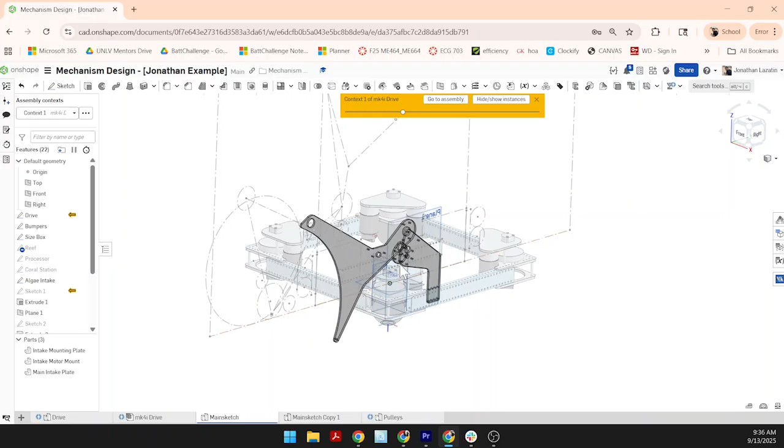Alright, so today we're going to go over a little bit of an intro to assemblies using the part studio that we created last time. This is the part for the 1 degree of freedom intake that we were talking about during class last week. I'm going to use those parts to show some ways to create an assembly here.

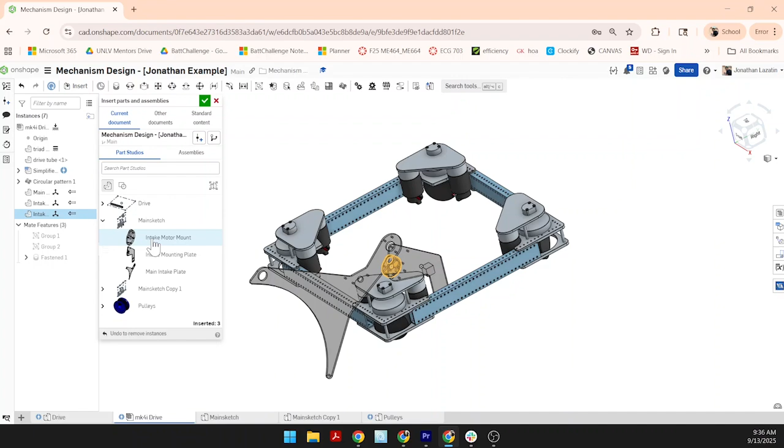The first thing I'm going to do is insert the parts from main sketch, which is where I design all the parts, so I can open that up. From here I see the 3 parts that I generated. I'll click those parts, without moving my mouse around to try to drop them in a specific location. I'm just going to click the parts and then press the green check mark.

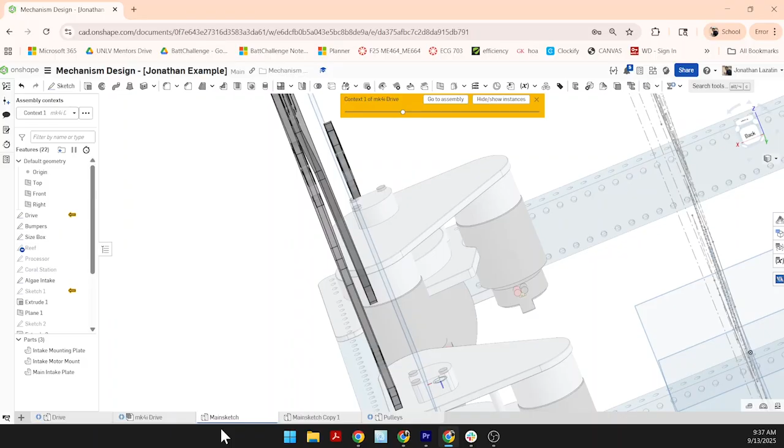That way it drops in the parts exactly where I designed them in the main sketch. Because I designed them in the places I want them to exist on the actual robot, this plate and this plate over here are exactly where I want them to be. So there's a couple of ways to get this to stay right here, like a cheater way to get your assembly going.

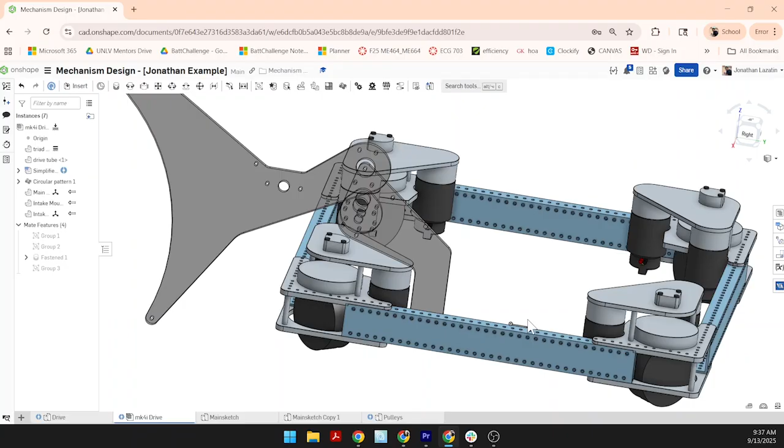If you know these parts are all, at least this mounting plate, where it's supposed to be, I can make a group and click the drivetrain and that side part. When it's in a group, they all stick together. Because the original mate was fixed and doesn't move, since this is grouped with it, it's also fixed and doesn't move without me having to create an actual mate to it. But we're not going to do that.

We're going to actually use mates today. Mates are different ways that you can constrain parts to other parts. They use what's called mate connectors to give you local coordinate systems and to match up in a way where it defines the specific degrees of freedom you want or don't want between 2 parts.

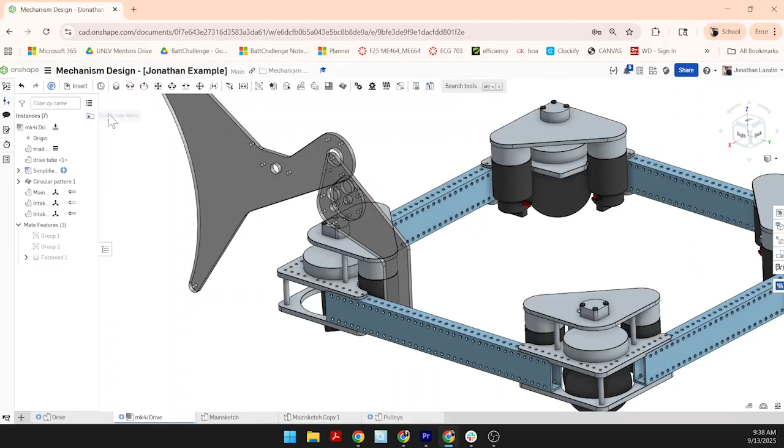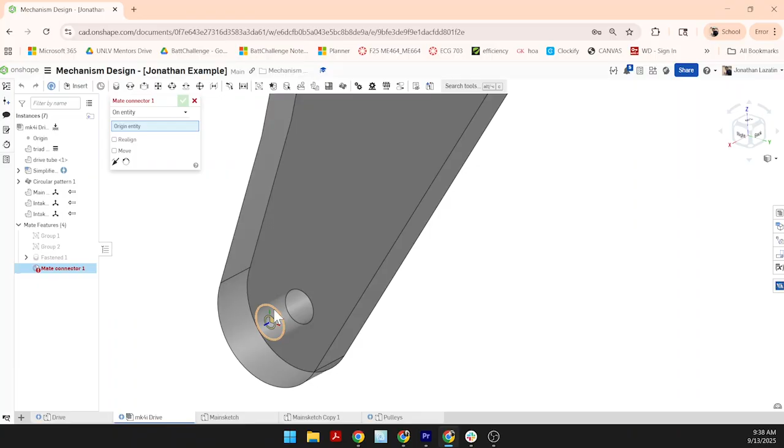For example, if I click this mate connector tool here and highlight a feature, it'll pop up with this orange disk, and you see this disk has a set of axes, blue, red, and green. In the convention of Onshape, blue is the z-axis, normal to the little disk that's getting populated inside that feature, and the red and green show you the directions of the local x and local y.

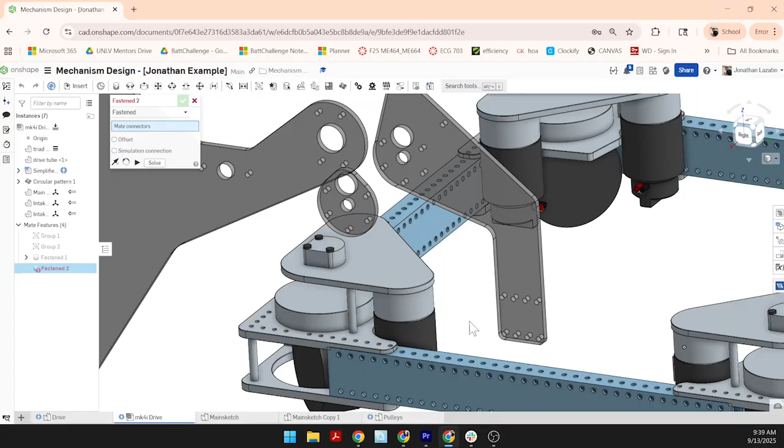So what I'm going to do here, in order to make this part stick to this part without it moving at all, so that's 0 degrees of freedom, I'm going to use a fasten mate. The hotkey is F. A fasten mate is a mate that makes 2 things attached to each other with no degrees of freedom allowed to move. I'm trying to see where that hole is. Okay, so these are the 2 holes I'm looking to mate. I'm going to press the fasten mate.

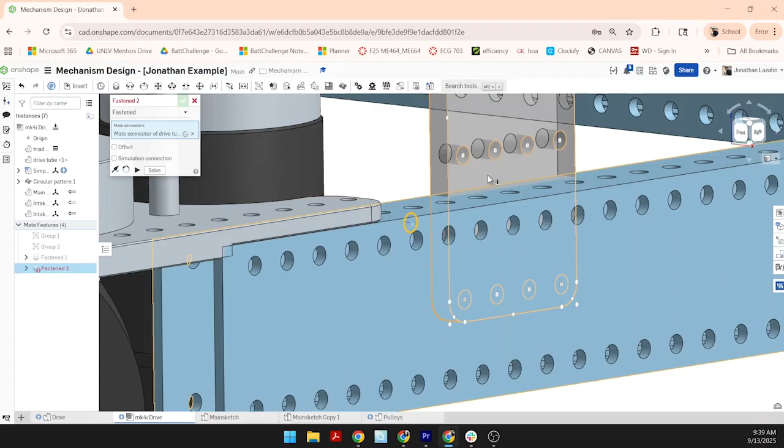I'm going to move this part off a little bit so I can see the hole better. I'm going to select here so that local axis pops up, that local coordinate system, and I want it to have the same origin as the local coordinate system at the surface of this plate. If I click here, you see the surface to surface touches, I solve it, it pops into the right spot, and I can press OK, good. So that's the actual axis I want it to be on.

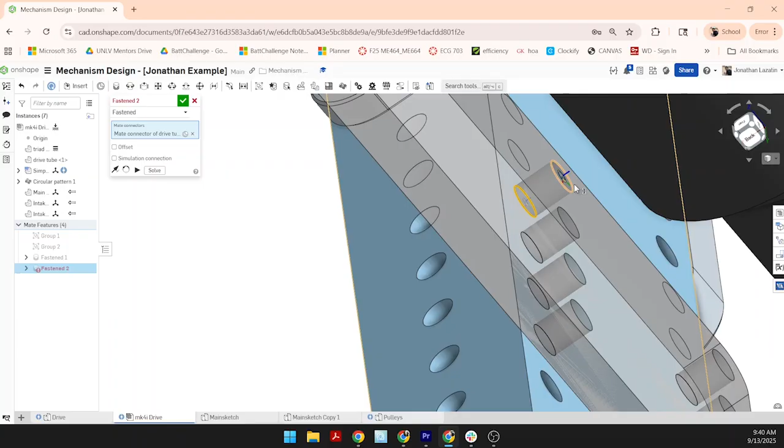Just to explain why that specific face of the intake - let's say I select this back face, it's the same z-axis. The z-axes are aligned with each other, but the x and y's are not. So if I click this one, it'll actually move the part. If I solve it, it'll move the part inside one of another, because the mate connector is trying to make these 2 coordinate systems, the origins, sit right on top of each other. So we don't want that in this case.

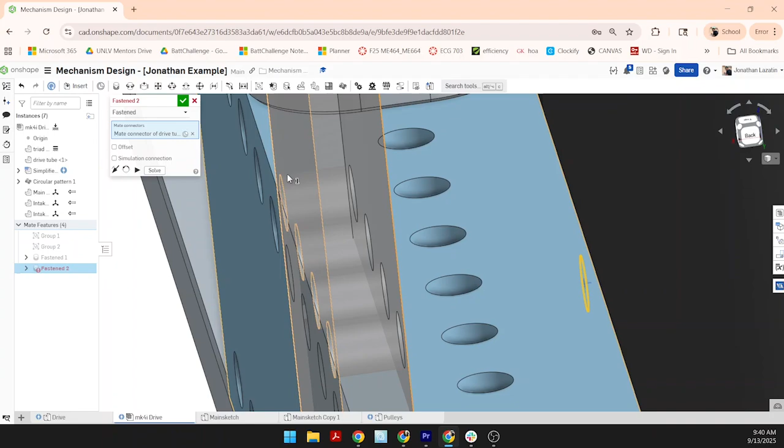We want the other face, because that is the face that we actually want to be touching the drivetrain. So that's fasten mate, 0 degrees of freedom, fully constrained.

I could also use fasten mate with an offset in order to get a specific distance. This plate and this plate are designed to be 1 inch apart, so I'll use the fasten mate hotkey F. I want that circle to touch that circle, but I want it to be 1 inch away. Usually to create separation like this, you go negative.

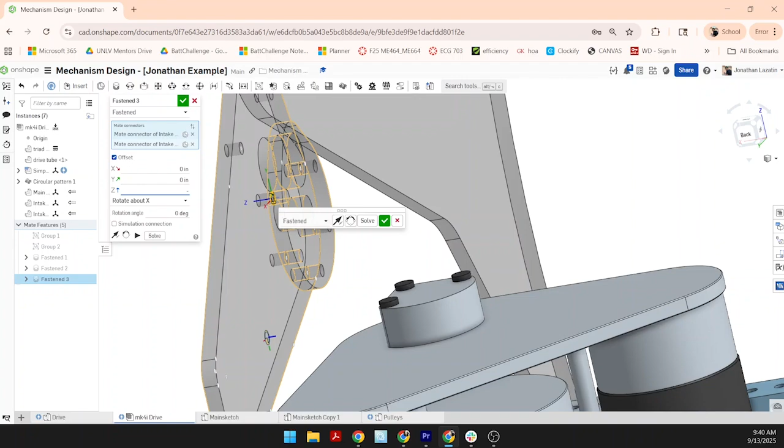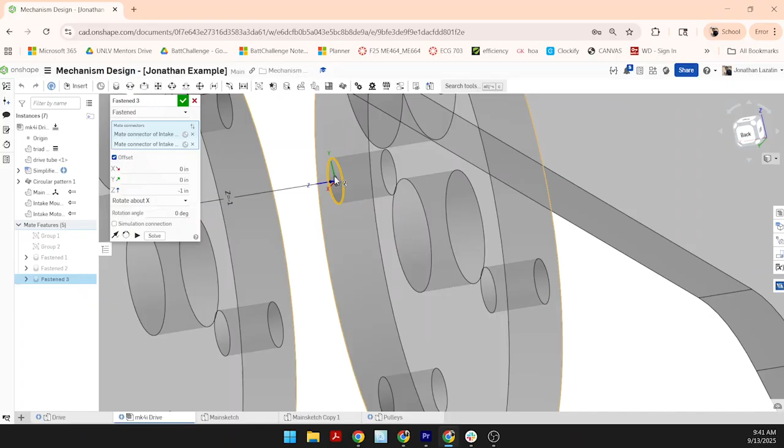So -1, sorry, I did that fast. I click this offset checkbox here, and then in the z-axis of my mate connectors, I want it to move -1 inches. This is z of your mate connector, not z of your assembly, right? So we're looking at this local coordinate system and moving in the z direction here.

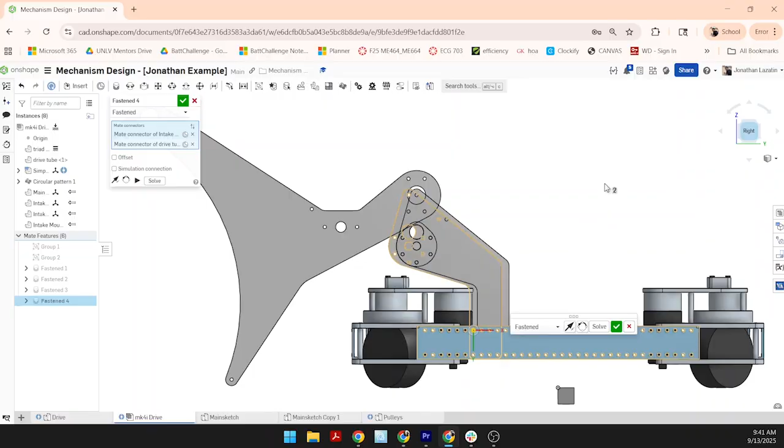All right, so that is the first mate, fasten mate. Next mate, I'm going to move this guy over here, still using a fasten mate, to drop in the second plate. Oh, and I did that in the wrong location - I selected the wrong hole on the other side. So you can see that it's about a hole off, about a half inch forward of the original plate.

So what I could do here is an offset. If I look at the local coordinate system, it's in the x-axis, so I'm going to add 0.5 inches to that coordinate system. Then it moves it right in line. So there are two parts - if I click on the right side, I only see one of them, which means they're perfectly aligned with each other. So that's good.

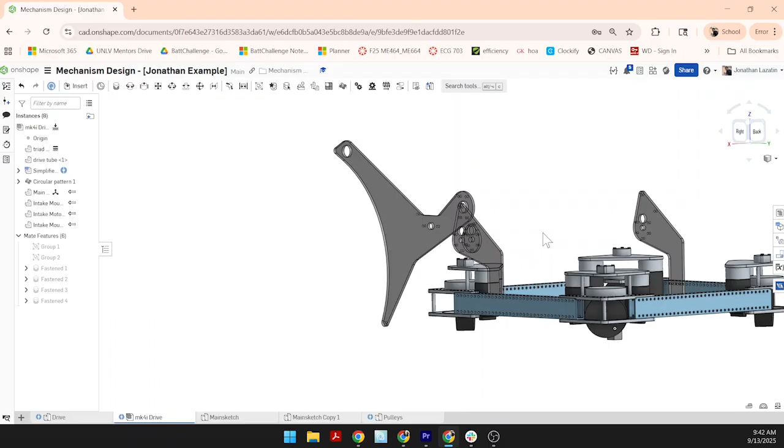And then I can select these two plates - I see these plates are 23 inches apart. So now we're going to go into adding parts from MKCAD into our assembly. 23 is the distance from this plate to this plate, and I want to put a shaft between those two plates.

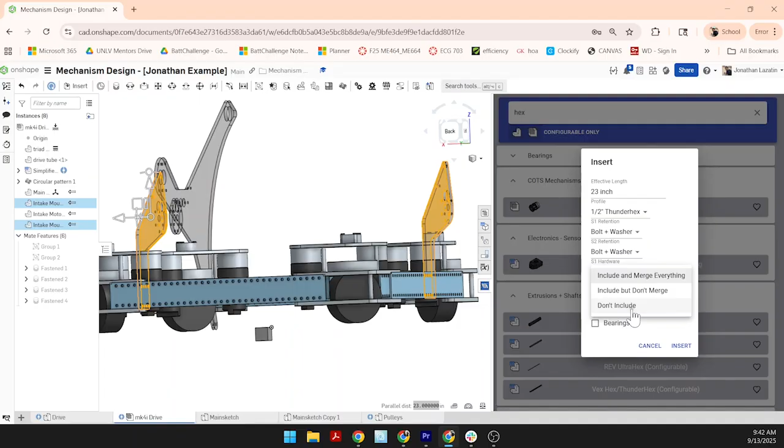So I'm going to go here to hex, and look for a 1 inch, or 1/2 inch hex shaft, and click that. I'm going to drop in my effective length here - Thunderhex is good. Then I'm going to change the retention to bolt and washer, and then put don't include. What I'm actually going to do is when I fully assemble this, I'm going to put a bolt and washer from the outside of this plate into the end of the shaft. So the shaft is going to be tapped with threads.

But if I use the bolt and washer retention here, it's going to put the bolt and washer right at the ends of the shaft, which is not what I want because it's going to have this 1/4 inch of plate in between it. So I'm going to insert that shaft.

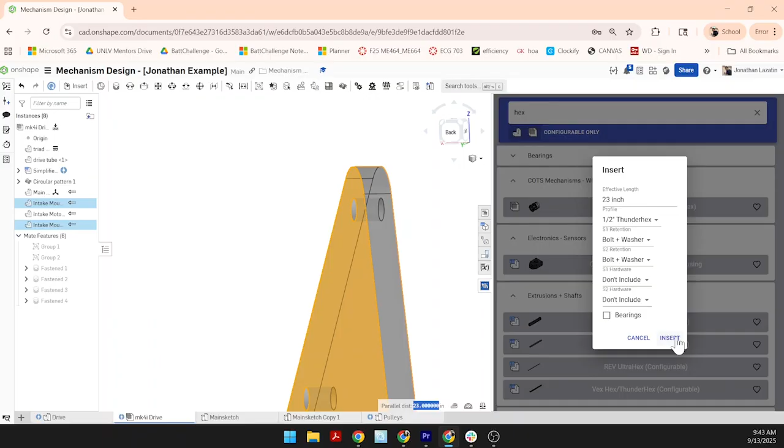And then I'm going to use the fasten mate again. I'm going to click the very end of the shaft, which is that mate connector here. Then let's go on this side - I'm going to select this interior hole. It's going to drop in the shaft. I'm going to press OK.

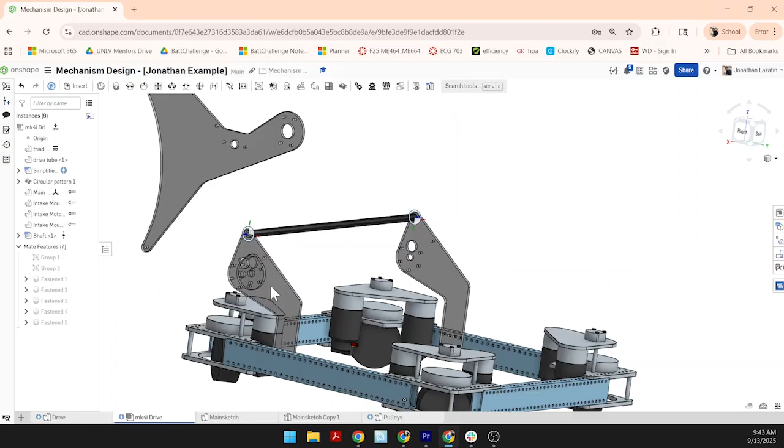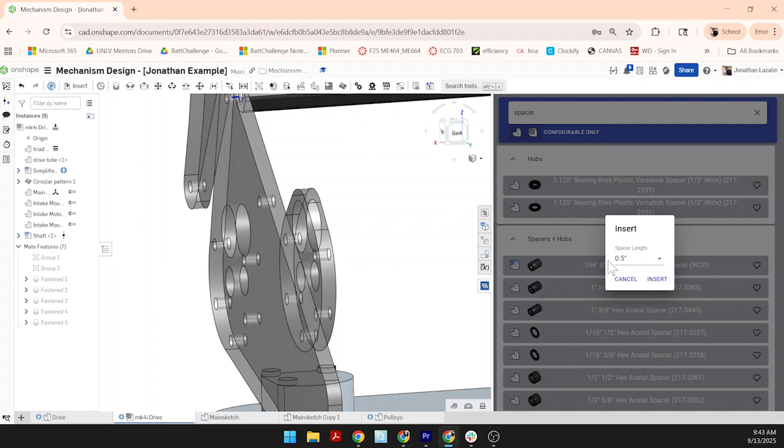So now I'm going to move this guy here - it has a shaft going all the way across the tube. I could also use MKCAD to drop in a spacer. We have a 1 inch space in between here, so I'm going to look for a spacer that is for a number 10. You can tell it's for a number 10 because the ID is 0.196. So that is for a number 10, 1 inch difference.

Insert. And so now it's going to drop in the part in the middle of my part studio. I use my fasten mate again. I'm going to fasten it to - let's go ahead and go to this location here. And then see how it goes.

Sometimes the mate connectors will flip, will not be the direction that you want. Even though it's the right connection point, it's not in the right direction. So I can flip the primary axis here and it'll move that part around.

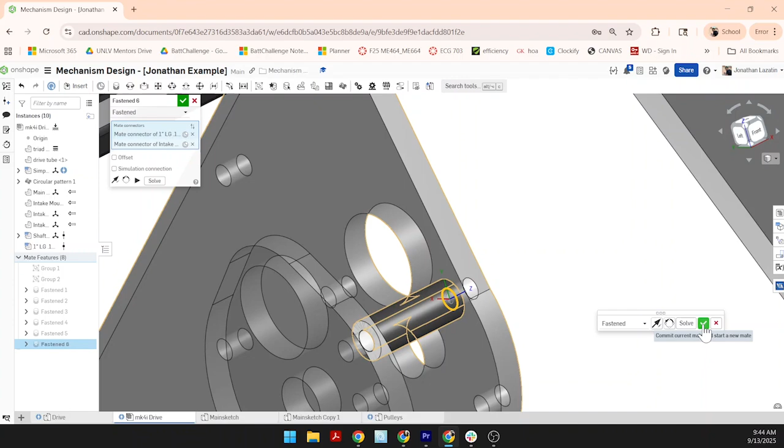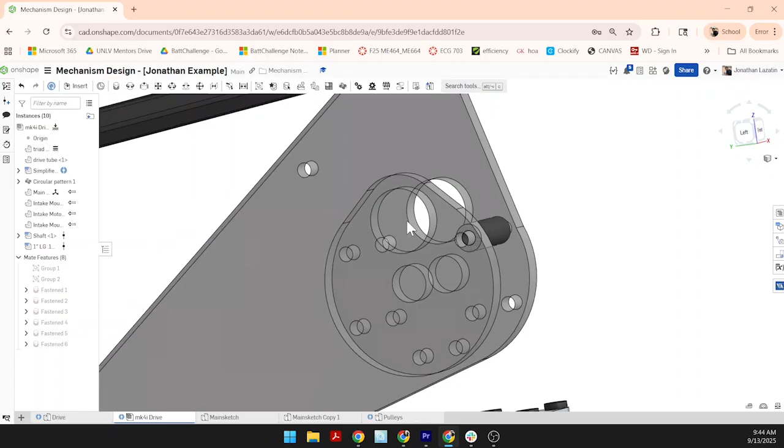Okay. And then, for this here, I realize I'm going to have a gear here. So this top hole does not have the same hole pattern as this, because we want to put a bearing, shaft and gear here, so we can't have a standoff or else that would interfere with the gear that's moving around in here.

So what I'm going to do to create the rest of this is use a circular pattern. Instead of adding another spacer and repeating with fasten mates, I can have this one part here, circular pattern. It's going to ask for the axis of the pattern, and the axis is going to be the axis that goes through any one of these circles.

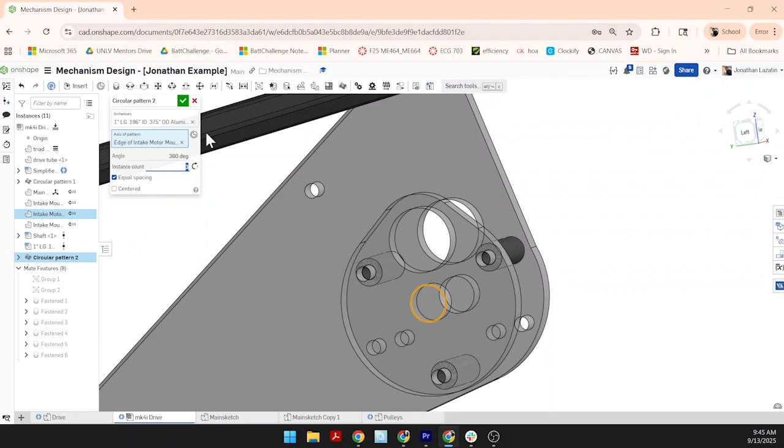So I can click this circle here, and instead of 2, I'm going to put 3. It'll have 3 instances of that initial spacer around this circle. So that is circular pattern. Then I'm going to talk about 2 more mates.

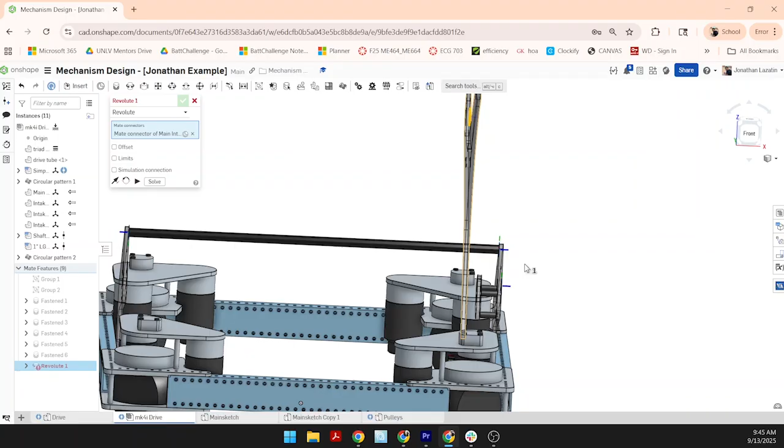Revolute mate is similar to fasten, except it removes 1 degree of freedom in the rotational axis of Z. So if I select this part here and then this end here, I click the whole plate. So I want to select the mate connector that's back over here on the other side of this hole.

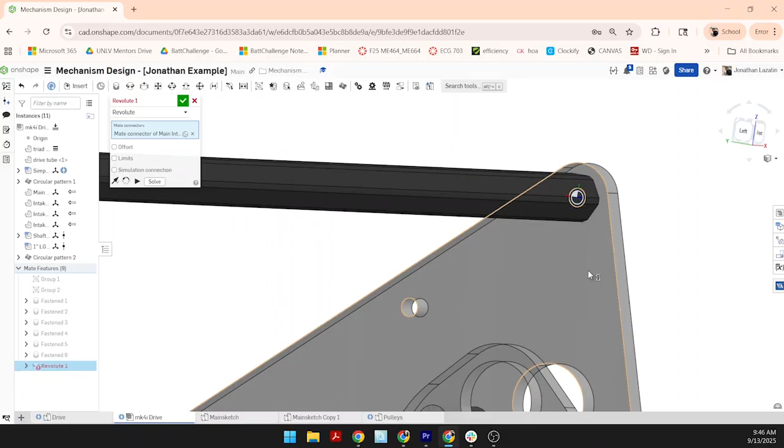This shaft is kind of in the way. What I can do is press shift and then move it over here. And then when I click this axis, it will use the hole. Right now it's using the mate connector of the shaft, but you can also get the mate connector of the plate. Either one of those could work in this case.

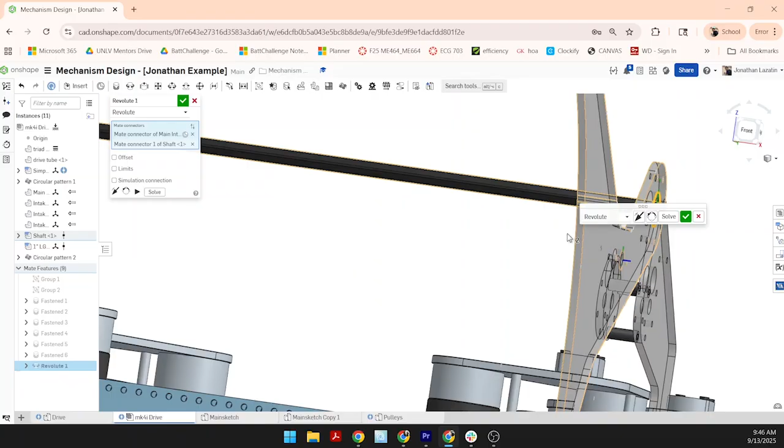And then because there's going to be a bearing in here and a gear connected to the outside, I actually don't want it to be directly in line with this. What I want to do is actually offset it again by 1 inch, and it's got to be negative in this case.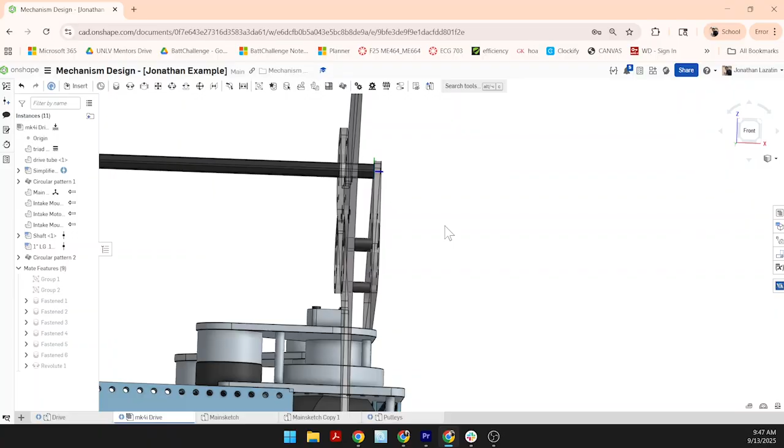So one thing that I'm seeing though is if I do that, these will be interfering with each other. So I probably want to redesign this plate to give some clearance to that, or I can move this in or out, which we just want to verify is not going to mess with the gearing position. So that's fine for now. So that was revolute mate.

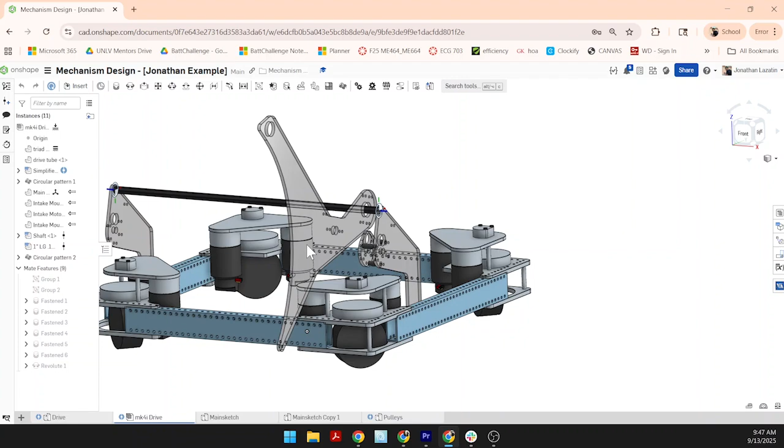So you can see revolute mate: I can't move it left or right, but I can rotate it. So it's fixed in the X, Y, and Z translational location. The origin is where I want it to be, the X and Y axes are locked, and the Z axis is allowed to rotate. And so this is different than a cylindrical mate.

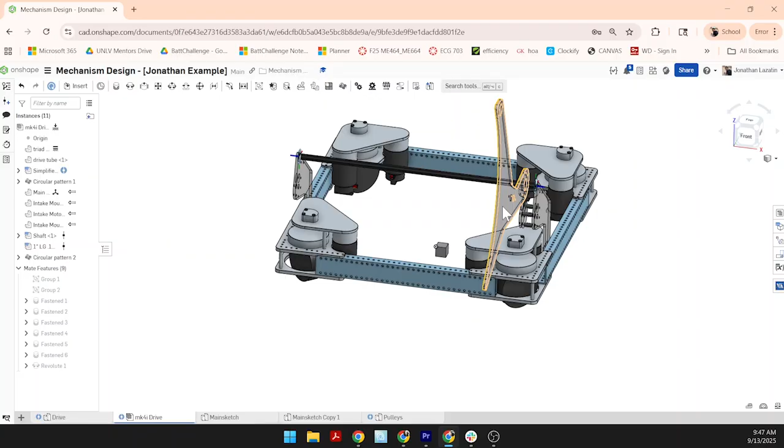So let's add another one of these plates here. There's another mate that's pretty similar, cylindrical mate. You can see in the icon here that it has an arrow that shows rotation, and another arrow that goes up and down, whereas the revolute mate icon just has a rotation. So what this is telling you is that it's actually allowing for another degree of freedom.

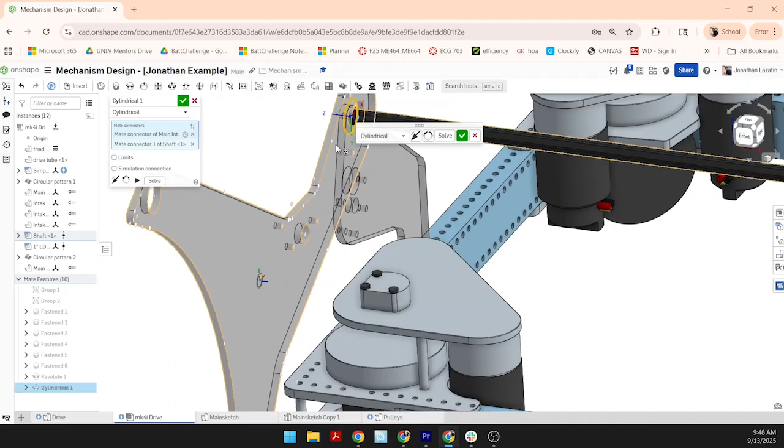So if I select this hole here and this hole here, it'll move it similar to how the fasten mate would. So I'm just going to accept that. And so it'll rotate, but it also can translate. It gives you rotation and translation in the Z-axis only. So you've got one axis of rotation and one axis of translation for a cylindrical mate.

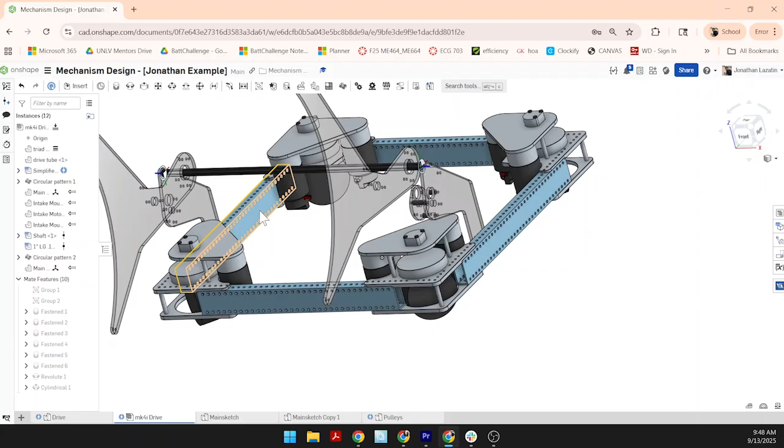So those are often useful if you want to have two parts where the axis is the same, but it's allowed to move. There are some ways that you can use some of these relations to make some of that useful, for things like this.

So let's say I already have this intake plate in here. Let me copy, paste again. I'm going to use a revolute mate instead. So I'm going to go here, select this face here. I'm going to do the same thing, an offset of 1 inch here.

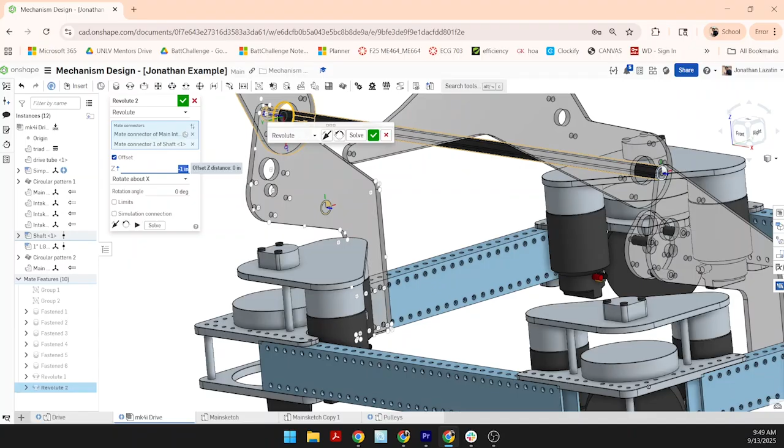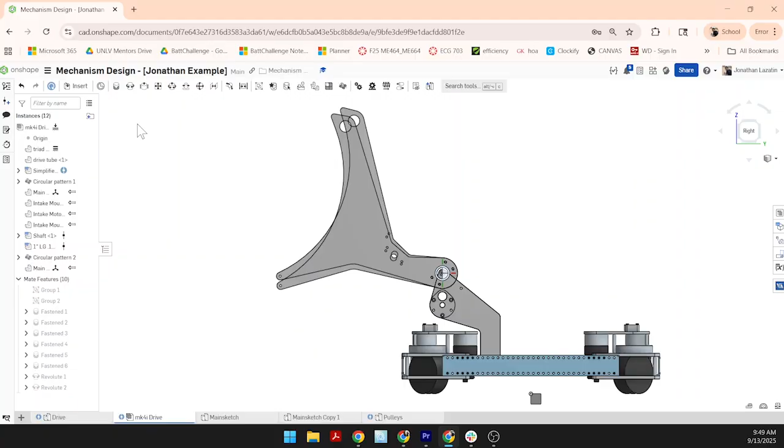Cool. So now this is exactly the same as the other side here. Now this is fixed in its X, Y, and Z location, like the origin of the mate connector that we placed here. That's not going to allow it to move. So if I want these two things to be lined up, so if I look to the side, these things aren't lined up, right? If I try to do something like a fasten mate between these two to get the holes to line up, and then even if I try to give it like an offset, so these things are, let's see, these things are 20.5 inches apart.

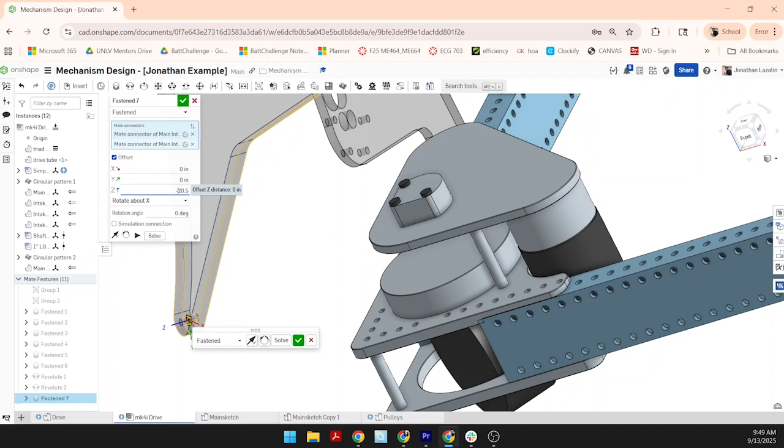If I did a fasten mate here, let's do fastened, and I know these things want to be 20.5 inches apart, so I give it that negative 20.5 inches. Oh, that works. So that's one way to do it, but you have to do an offset, which is not as intuitive. Like you have to do some measurement and figure out some distance. I wonder why it didn't over constrain.

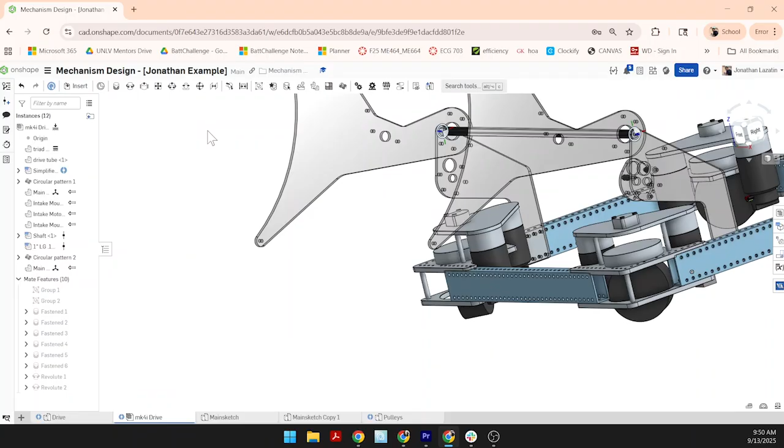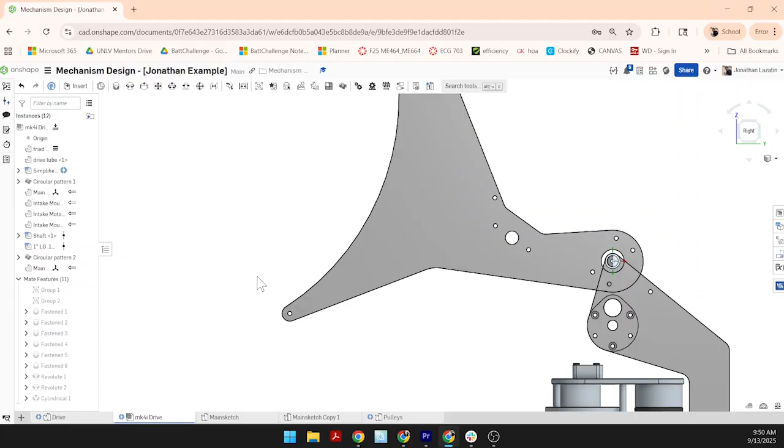Anyways, another way you can get those to line up is if you just use a cylindrical mate and then select like this bottom circle here and this bottom circle here. So now these two parts are allowed to, the axis has to be the same, but the Z direction of them doesn't have to be defined.

So let's say this guy is actually interfering with something, so I want to move it out a little bit. If I take that revolute mate and I change the offset to say -2, it moves inward, right? Your cylindrical mate won't break because it's allowed to have that translation degree of freedom.

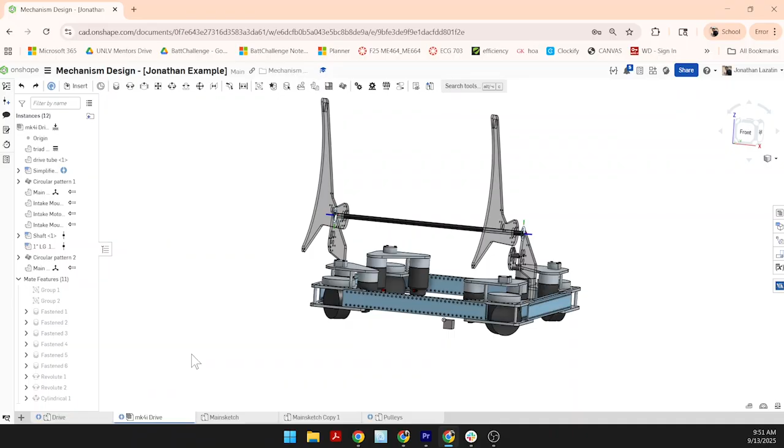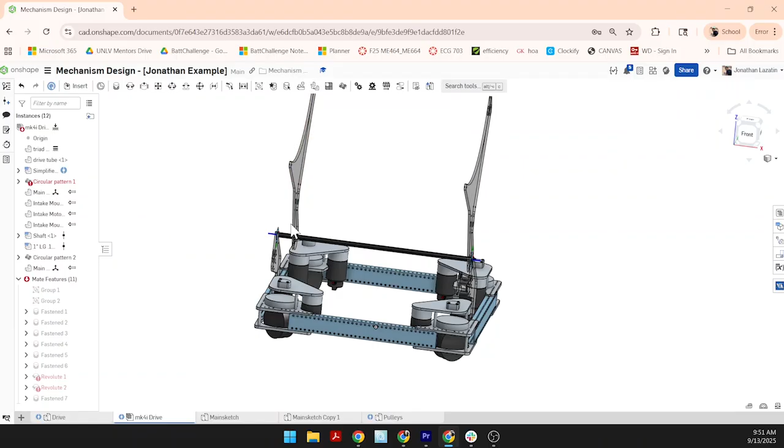If I do Control Z and I add in that fasten mate again, so fasten mate, and then offset -20.5. So it puts it right there. If I do the same thing and I go here and I say, I actually want this to be -2 inches, it's gonna break stuff because now what you're calling here as a 2-inch is conflicting with the 20.5-inch distance you're trying to impose here, along with the distance that you're trying to impose here.

You see how it actually is now touching because it's enforcing the 20.5 distance and it's breaking that 1-inch revolute mate that we started up here. So that's why the cylindrical mate is a little better use case in this scenario, because it allows for that translation of this part.

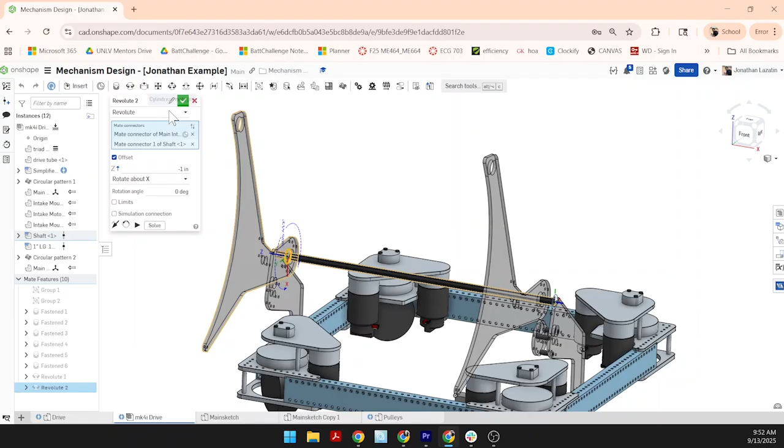So what I could do here is instead of having to delete this mate and then change it to cylindrical, I can go in here and I can change this to, oh, this is the right mate. This is the wrong mate. Did I already break it? It's already broken. Okay. So I'm just going to put it in cylindrical mate. There you go. So now it's fixed.

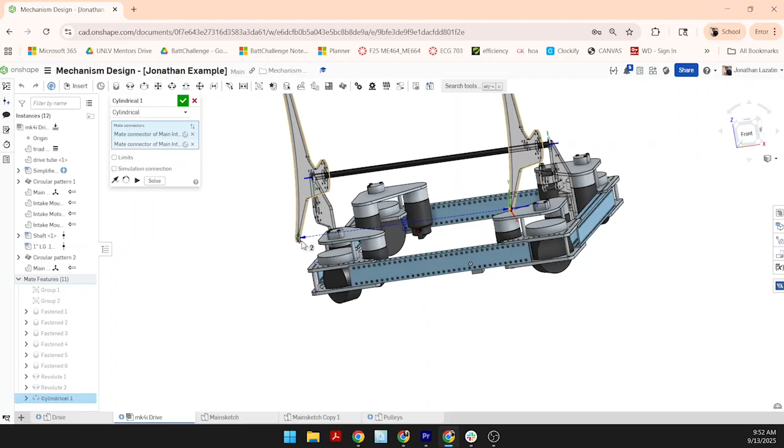What I was going to mention before is that you can actually change mates in the mate tool window. So let's say I didn't want that to be a cylindrical mate. I wanted that to be the fasten mate. I can just select this here and change it to a fasten mate if I wanted to. So that would work. So those are different ways you could change mates.

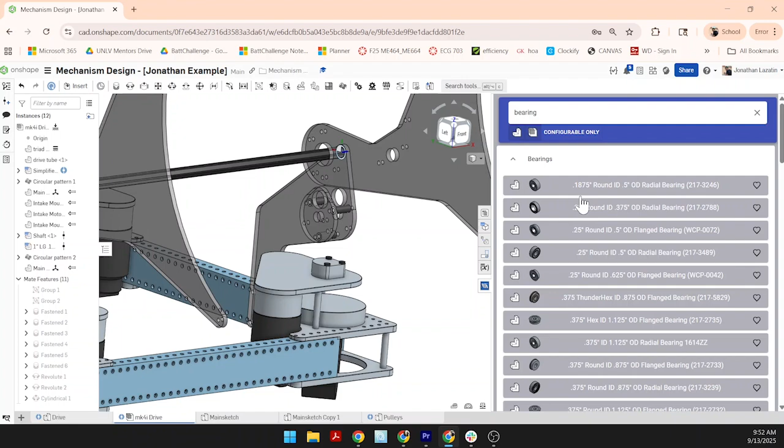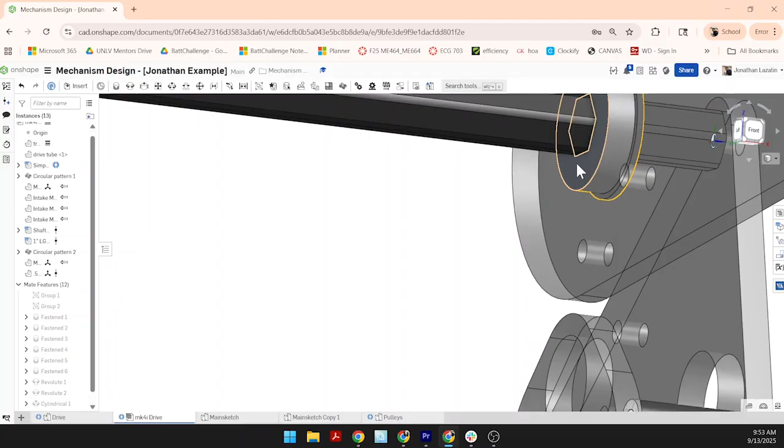Other parts that we would want here in this assembly, just to show you a little bit more of MKCAD, is I can look for bearings. So in the bearing section, these are for a hex. So this is a 1/2-inch hex. So I'm looking for a bearing that has a 1/2-inch hex. I can mate connector those with a fasten mate. I want this flange bottom section to touch the outer side of this plate. So now that gets mated. So you can see the bearing is sitting inside that plate now.

Copy, paste this, same thing. I want this lower section of the bearing body to touch this outer section, and it's flipped the direction that I want, so I want to flip that.

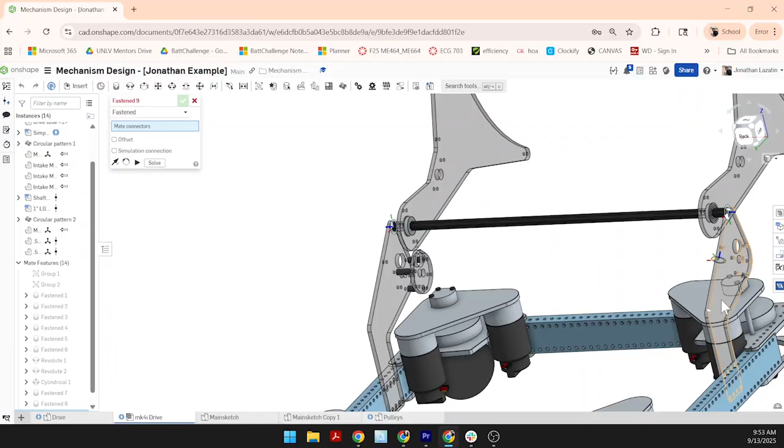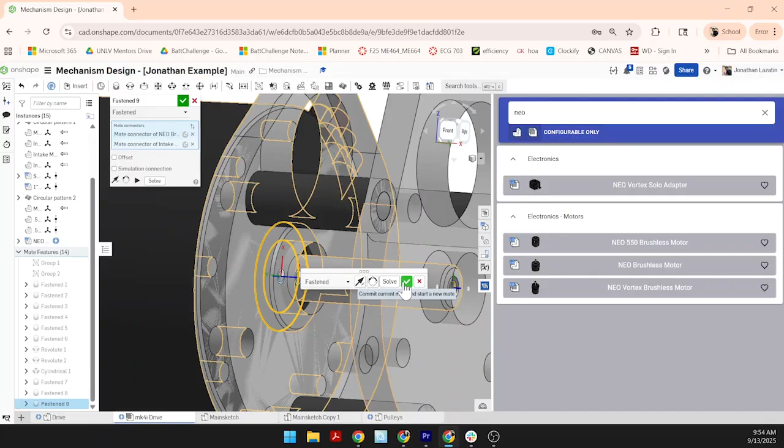Cool. And then I'll just show the inserting of a motor as well. We'll do a motor and a gear. So I can do like a Neo motor, Neo brushless motor here. Insert. I want the face of the motor to contact the face of the motor mount. Flip the direction, and we can see here that the motor itself has like this boss feature on it, like a little cylinder popping off the face of the motor, and it's interfering with the diameter of that plate.

So I'm actually going to offset this guy. I can't make this hole bigger to accommodate this boss because of this bearing hole. So I'm going to move this back by 1/4 of an inch.

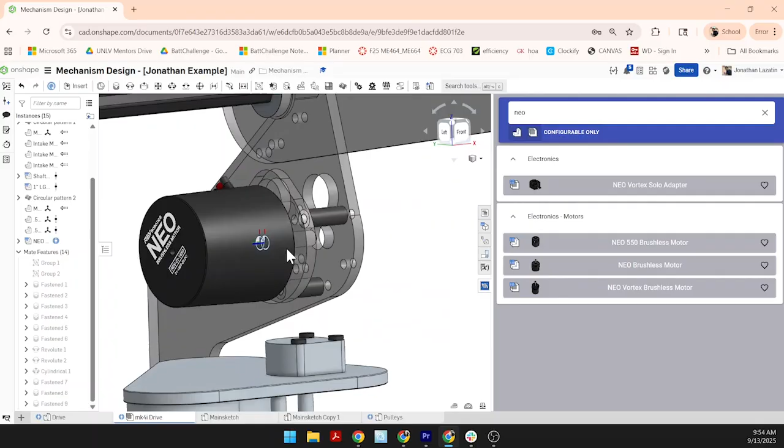You can see it there. So then I can add in a spacer here like we added in the spacers from here. And let's go ahead and do the 70-tooth gear that interfaces this with the shaft below. So because this is a dead axle setup, I actually want the gear that has a hole in the middle.

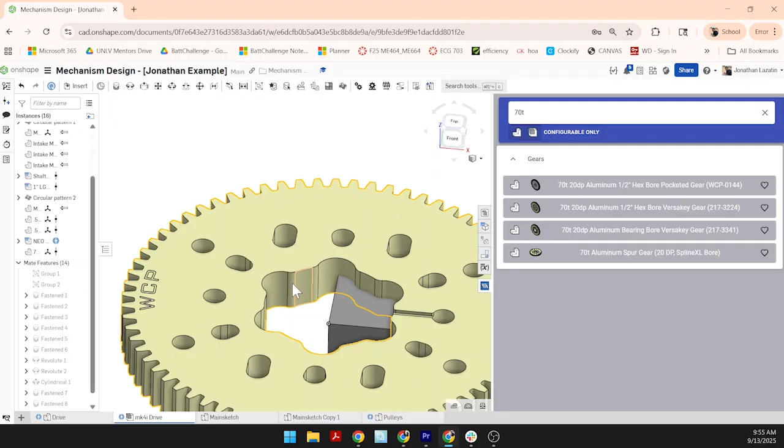So let me check this guy over here. Or like a large hole, so not a hex. So you see this has this funny shaped hole on the inside. This spline here allows you to get a few different kinds of products to interface with this part. We really want to use this with a bearing. So actually this bearing over here is not in the right spot. It's not going to be in this plate. It's going to be in that gear.

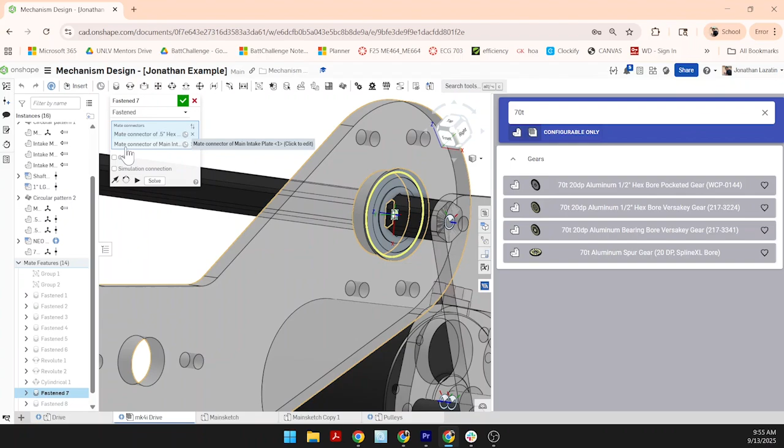So what I'm going to do is I'm going to right click this guy. I'm going to say show mates. It's going to show the mate that is applied to this bearing in this plate. I double click here. It shows me it's fastened 7. I'm going to open that up, and I'm actually going to say I don't want this connected to the main intake plate mate connector. I'm going to X that, and I want it to be in the center of this guy here. So for shapes like this, it's kind of hard to click the center.

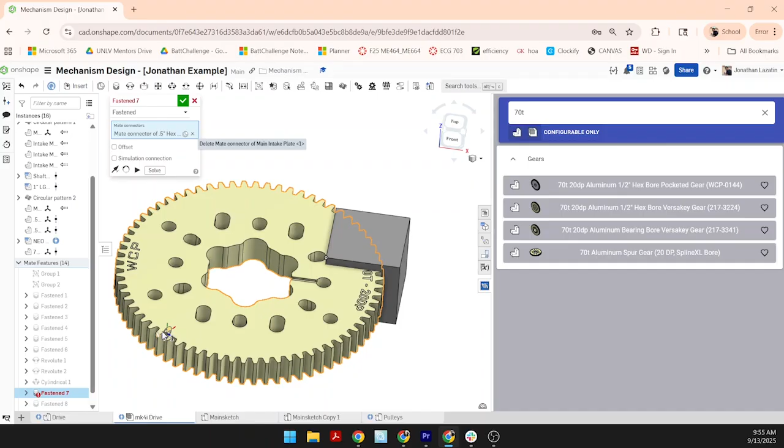So what you want to do is you want to highlight the face, and that should give you the center of that face. But it can still move depending if you're close to another feature. So something that I do to kind of guarantee that I can find it is go to the face and I select shift. I go to the center, and then shift allows all the face points that could potentially be a mate connector to remain open, and it's not going to try to smart find out which one is right next to you. So I can select the middle one here, and it puts the bearing right in the middle.

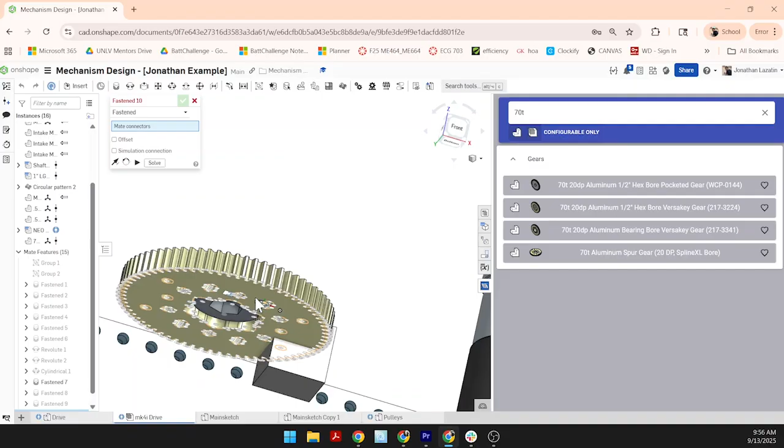And then same thing on the other side. I'm going to do another fasten mate. I'm going to select the center of this back face, and then I'm going to select this face here. Cool. So now that gear's on there. Now you can see the holes that are in this plate are actually designed so that they're supposed to interface with the holes here. So we could actually do that revolute plus cylindrical mate trick here as well.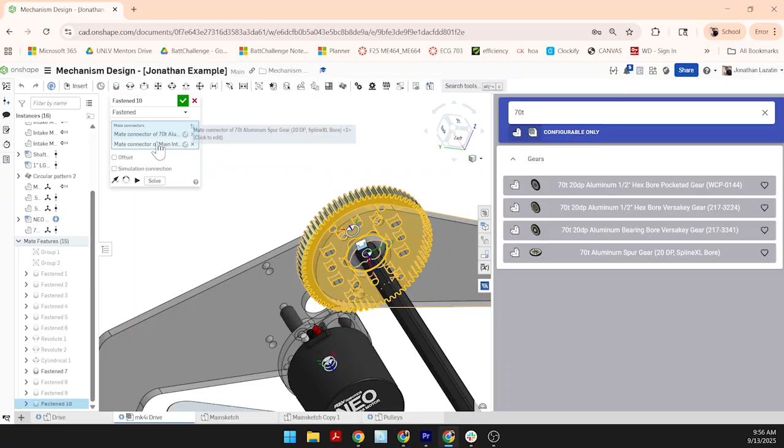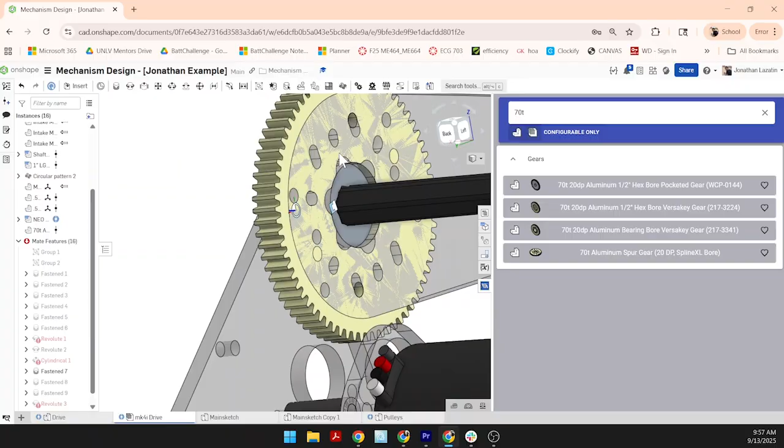So I'm going to go to that fasten 10, and I'm going to change this fasten 10 to a revolute. So now this gear can spin in the context of that plate. And now what I want to do is I want to use a cylindrical mate to make this hole line up with this outer hole here. Wrong direction. There we go. So now, if I look at it sideways, this hole is lined up, and this hole is lined up. Did I select the wrong one? Might have selected the wrong one.

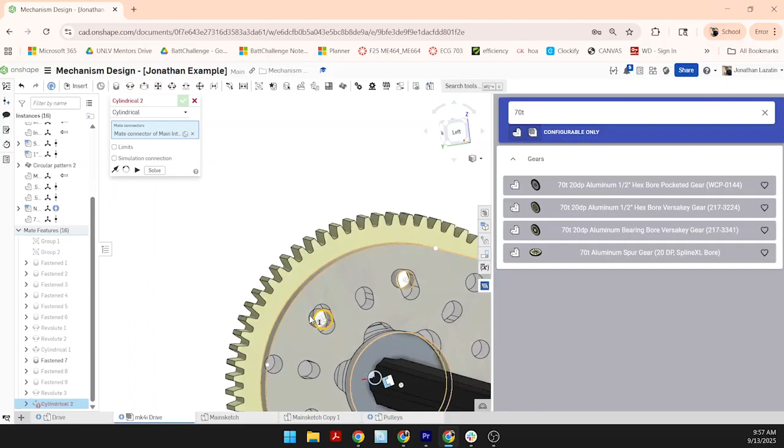Oh yeah, I broke some mates. So let's delete that guy. Let's try that again. Let's bring the intake all the way in a position that we want it to be in. Okay. There we go. So those are the holes we want to line up. So let's try that again. Cylindrical mate. I want this hole to line up with this feature here. There we go. So no mates are broken. Nothing's red over here. I can see my holes pass through. So that means I can actually fasten this stuff together.

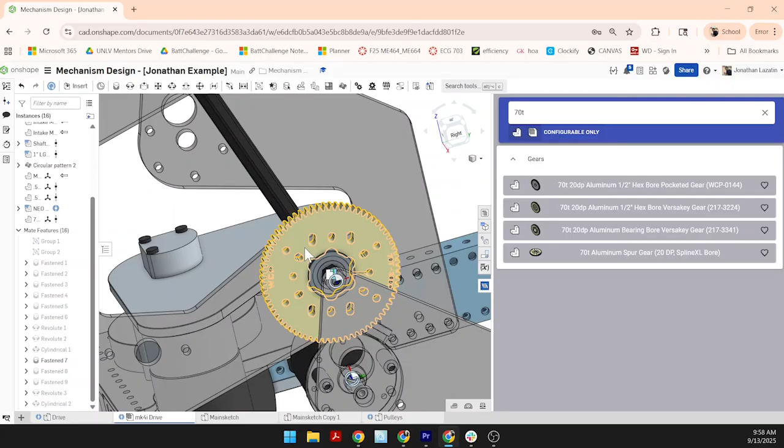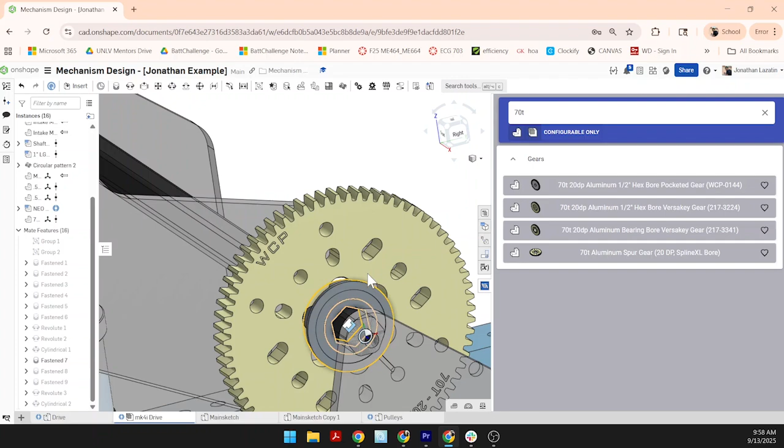And we can see that because the gear bearing assembly has a revolute mate to the center of the spinning part of this intake plate, and the cylindrical mate makes sure that these two holes are sharing an axis, when I rotate this, it actually acts kind of like a fasten mate. Those two things will stay fixed together. So as we use the revolute mate from the main intake plate, we use the revolute and cylindrical here as kind of like a fasten for some circular features. So that's a way that you can use assemblies to put together robot parts.